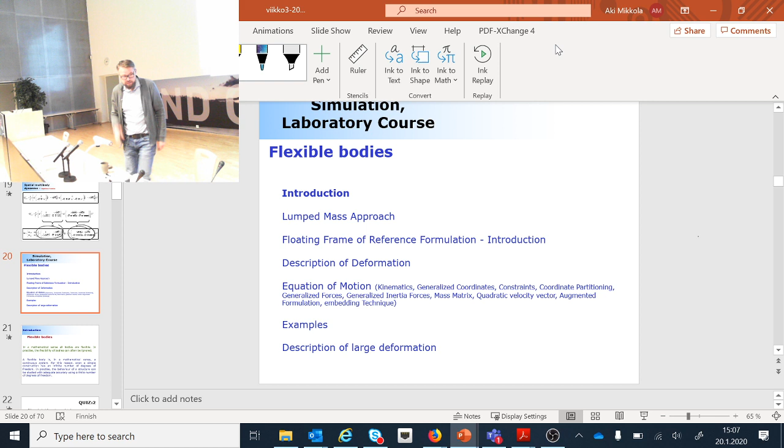First I will have a short introduction about what flexible bodies are and why you should model flexible bodies. Then we're going to look at two methods. We'll explain the lumped mass approach, and then I'll explain a problem with the lumped mass approach, which is called numerical stiffness. Numerical stiffness is something I will ask as an in-class quiz, so keep this in mind. As soon as I start the discussion about numerical stiffness, put your full attention on me. Once we're done with that, we'll move on to the floating frame of reference formulation, where I'll explain the short background of the finite element method, where it originated from, and what the idea is. Shortly speaking, it's all about how to predict how particles between the nodal locations behave, based on certain assumptions. This behavior is typically predicted using polynomials, and how that creates something important called shape functions, which I hope you'll understand based on my discussion. But let's get started with the lumped mass approach.

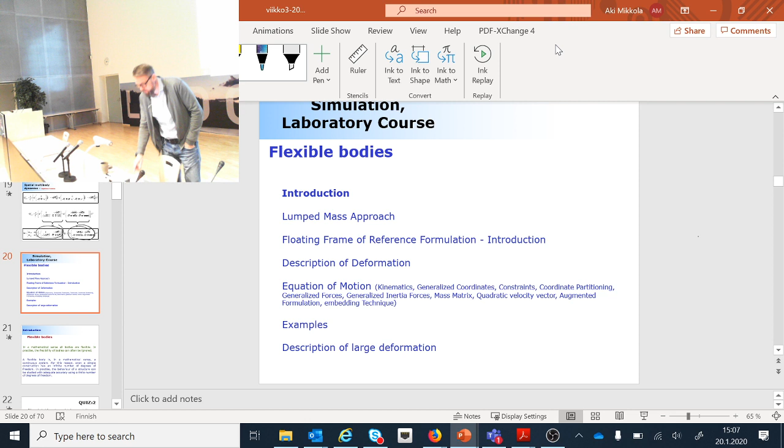All right, let's get started with the overall description of flexible bodies. You know there's no such thing as rigid bodies in real life. You cannot purchase a rigid body because every single body is a deformable body. Now comes a difficult question: if every body is flexible or deformable, should we model all bodies as flexible? This is a more complicated question than it may seem, because the reason to model deformable or flexible bodies is to increase the accuracy of the models. The history of multi-body dynamics started when the whole method was invented in the late 80s, beginning of the 90s, and all bodies were rigid. Soon people realized this assumption of rigid bodies is not very good, because it can lead to predictions very much against reality, so the accuracy of the models was low. To improve accuracy, they understood that deformation plays a significant role and must be accounted for. This tells you the reason why you should model bodies as flexible bodies: to increase accuracy.

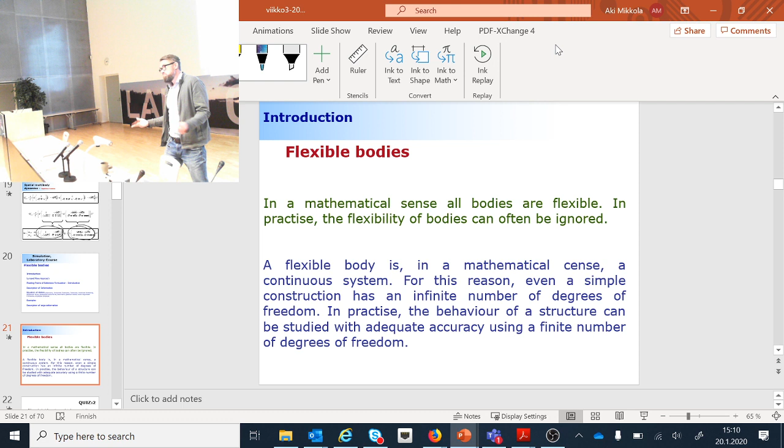Alright, so let's move on to how the methods work. But prior to that, when body deformation needs to be accounted for in a multi-body application, the considerations are: when large forces are applied to the system, when the natural frequency of the body is low, or when a slender structure is considered. There's no general rule to make this decision. Okay, so let me move on to this next.

Oh, now we have 27 students. Good number of participants. Okay.

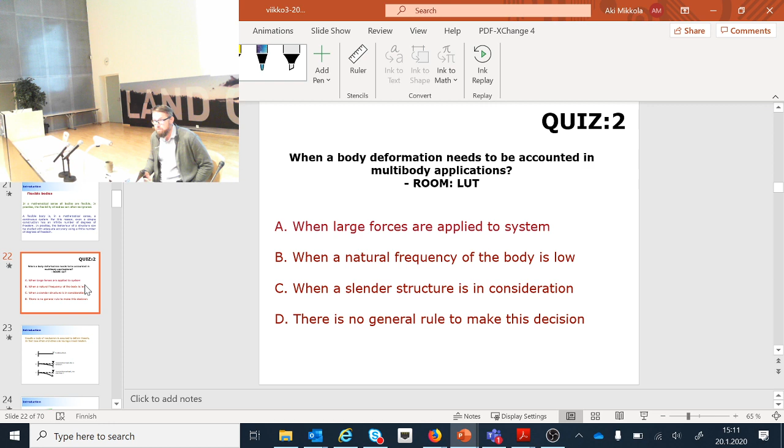Okay, let me explain something, and then we'll move back to the in-class quizzes in a minute. This is what I shortly explained to you in the course on simulation of mechatronic machines. Flexible multi-body dynamics can be considered its own discipline, and this discipline can be divided into two categories based on the amount of deformation: small deformation problems and large deformation problems. It's very hard to say where small ends and large begins.

Here's the difference: if your strain-displacement relationship is nonlinear, then you can describe large deformation. On the other hand, if you're using a linear strain-displacement relationship, then you're limited to small deformation. This is what I explained to you already, but it's important, so I need to make sure you understand this.

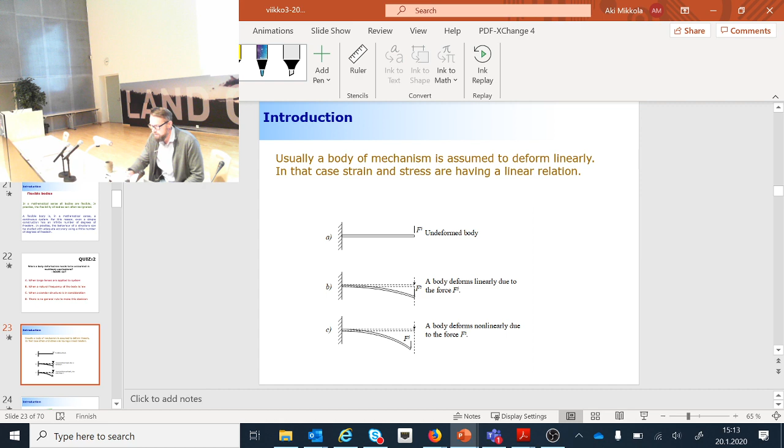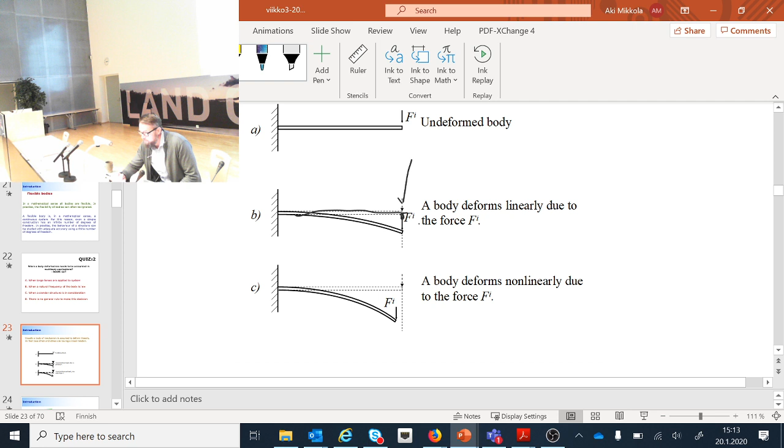First of all, what is a displacement? Displacement is the relation between my original configuration, which in the case of a cantilever beam is a straight configuration like this, and the deformed configuration. The displacement tells you how this particular point moves because of the loading force applied at the free end. This is going to be hard to draw clearly, but let me try.

Here, this is the displacement, called the U displacement, the deformation due to this force. Deformation, of course, depends on where you look along the structure; it's going to be different here versus there. So that's what deformation is: the difference between the original configuration and the deformed configuration. You can express the deformation with respect to the length of the body, so it's a function of x.

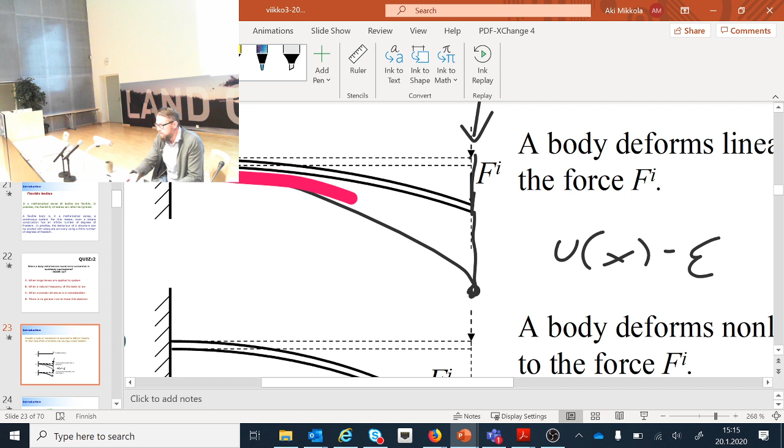There's a relation, a possibility to derive strain from the displacement, denoted as epsilon. If this relation is linear, that's when you can capture small deformation only. What does that mean? If you have this structure, as shown here, and you load this free end, the free end will stay in the loading line, which is fine if the deformation is small. But if the deformation is large, say it moves to this point, the deformation looks like this—and you can see that's not what happens in reality. In reality, the deformation is something like this, and the difference is that there is an axial movement. This axial movement requires that the strain-displacement relationship be nonlinear.

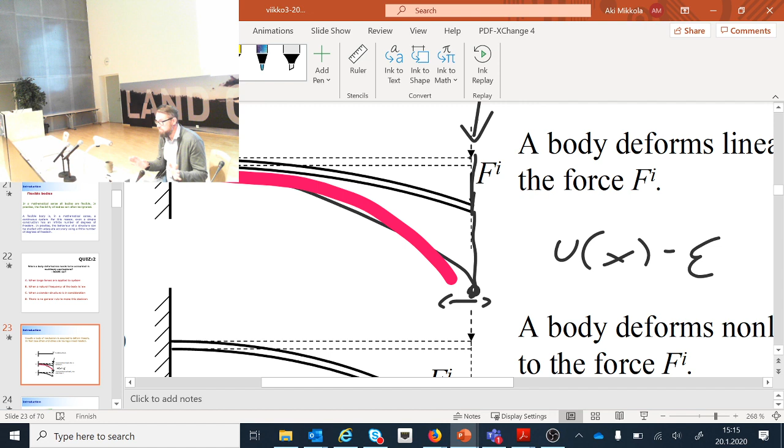There are methods to account for that nonlinearity. We will shortly touch on those methods, but the main emphasis will be on small deformation problems only. Okay? So that's how it goes.

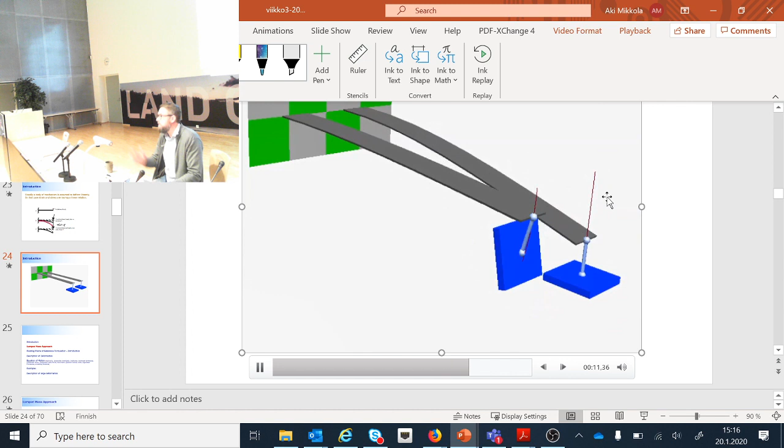Now here's an animation. When you look at it, it's clear that this one accounts for the nonlinear deformation, while this one assumes the deformation to be linear—the strain-displacement relationship is linear. This is sometimes referred to as geometrical nonlinearity, because it introduces significant geometrical changes to your structure, that's why.

Then there is another type of nonlinearity that can take place, material nonlinearity. The relation between strain and stress could be linear if we're speaking about small strains, but it becomes nonlinear if you have plastic deformation. That's what you already know. In multibody dynamics, we typically never discuss material nonlinearity. Only in certain biomechanics applications is it accounted for, but usually it's not. Why? Because often, if speaking about steel material, if you have permanent plastic deformation, then you have a really, really lousy design.

Why is it a lousy design? Because if you have any structure, it should not experience plastic deformation, except very locally—globally it should not take place, because otherwise it ends up as a bent structure, whatever the loading direction is.

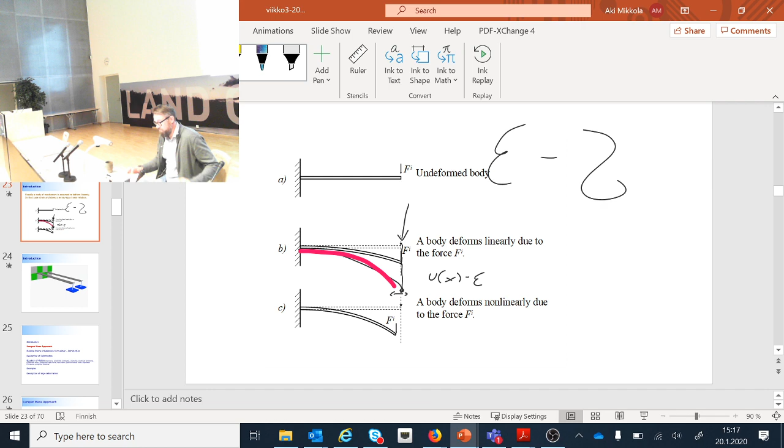Okay, now we're going to look at this first method that you're already familiar with. We're going to look at why this is something that we cannot use in practical cases, and it's related to computational efficiency. Computational efficiency of this method is low because of something called numerical stiffness. This is not yet the time that I will explain it. We'll explain it in a second.

Okay, let's first look at this.

Do we have a problem in streaming? We should not, but it looked like the online participants are now coming into play. That's how it seems. Okay, let's leave this for a little while.

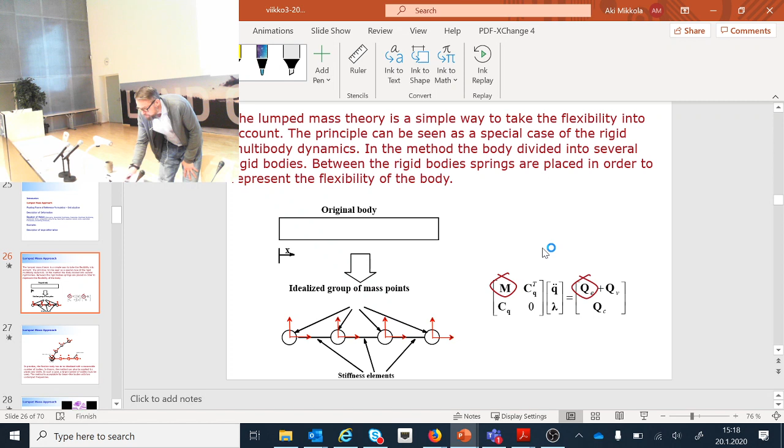Let's look at this first method. Now this first method is something that you already know. It's lumped mass theory or lumped mass method, which is very, very simple. It's not in the family of flexible bodies, because these do not need any changes in the kinematics. You just take the original body, which usually has to be a beam-like body, and you divide your beam-like body into a number of rigid bodies. And then what you're going to introduce between these rigid bodies is stiffness elements that introduce stiffness to all 6 degrees of freedom. That's the method in short.

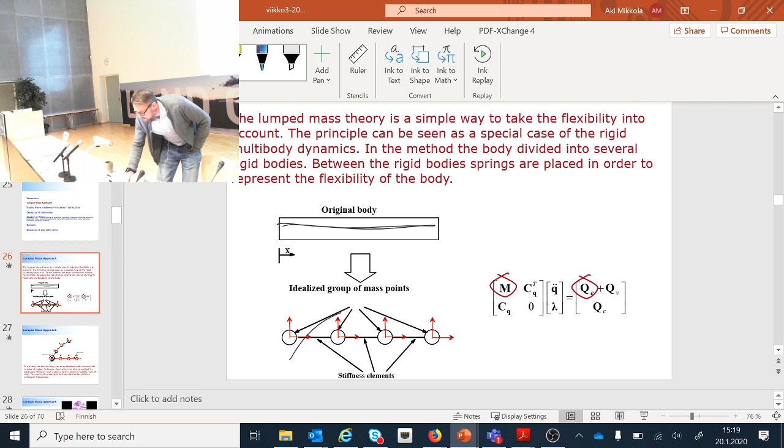Now, what is this numerical stiffness that this method is introducing? Well, if you look at the frequency content of this structure, there are low frequencies, which are typically associated to bending description or bending deformation. If this beam-like structure is bending like this, the frequency is fairly low.

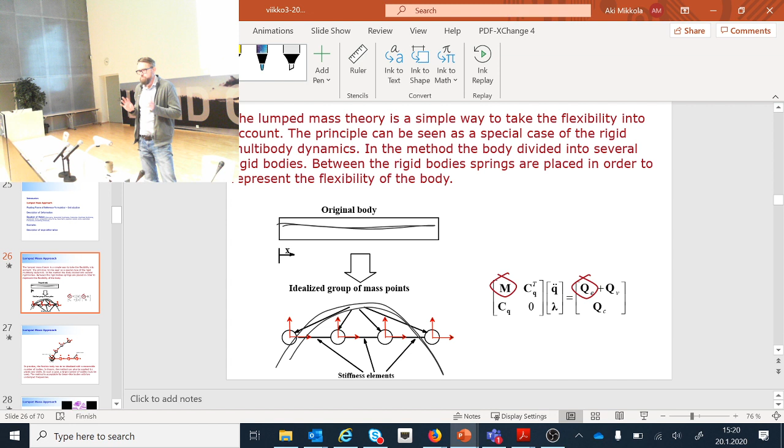If speaking about the numbers, it could be, say, 50 hertz or less than that. But it also includes very high frequencies. Where are these high frequencies coming from? Each one of these bodies can move with respect to each other. So it's possible that the body in the middle is moving axially with respect to its neighboring bodies - axial deformation. And if you think about that frequency, that's much higher than the frequency associated with bending.

You got it? There's no stick here, so it's a little hard to make a demonstration. What kind of lecture room is without a stick? Okay, this is another good example. I'm not going to break my pen, but you know, the bending deformation here, I can easily do it. But stretching this, only I can do it because of big muscles - big muscles make it happen. But you cannot do it for sure, for the same reason. Now you need a lot of force to make this stretch axially, so it's associated with a very high frequency.

Now comes the problem. So we have small and high frequencies in the same model. So how does that make your life difficult? Let me explain why.

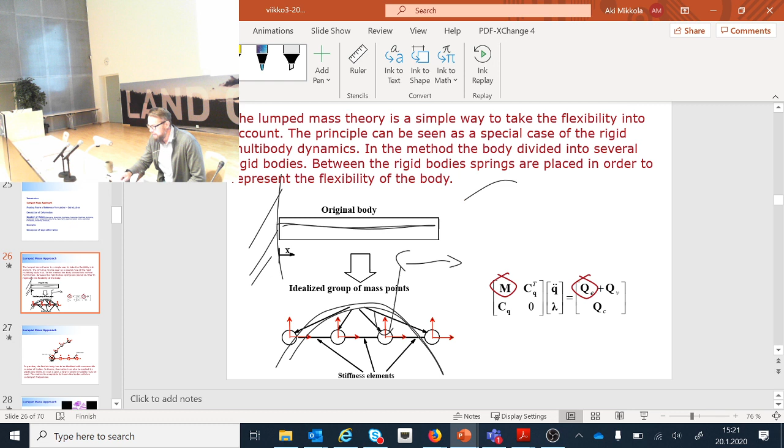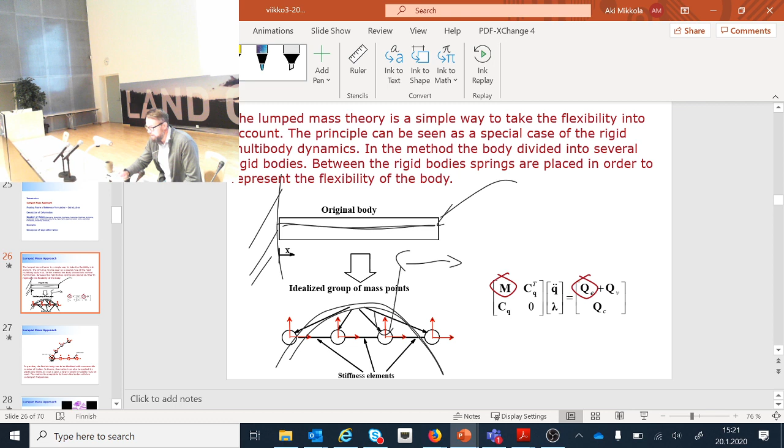Now, if we look at the response of this structure, such that we can attach this to ground here, and we load it in, say, a random direction, it's going to cause bending deformation, but axial deformation too. So now, if you look at the response with respect to time - here's your response, let's say x this direction, and time - the response looks like this. But now, if we take a close look at the response, let's say we take this particular spot here and make it much bigger, you will realize that there is a very high frequency here, which may not take place in reality. This may be very artificial because of the modeling technique we have.

But numerical integrators are able to identify this. They recognize that, wait a minute, something happens here. So let me tune my time step to figure out what this thing is that happens. So it actually tunes the time step such that this frequency is captured. Why? No reason, because we don't care about that - we only care about the big picture. But it's not allowing you to do so because it is looking at the details and is not willing to give up the details. So that's numerical stiffness.

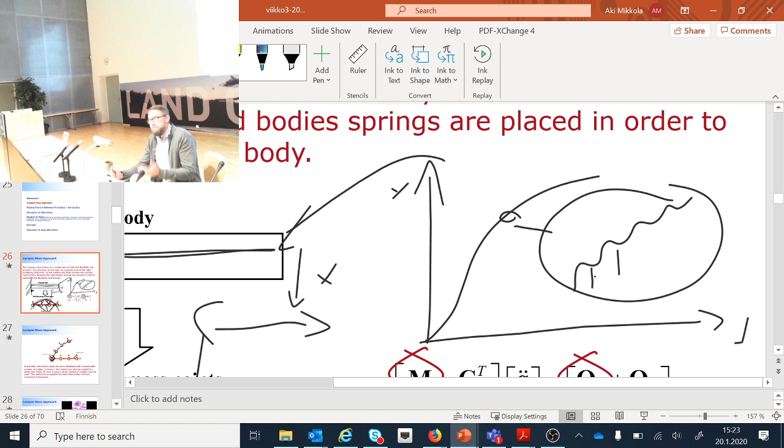So shortly, if you have a structure - let's make another drawing - if this is the frequency content...

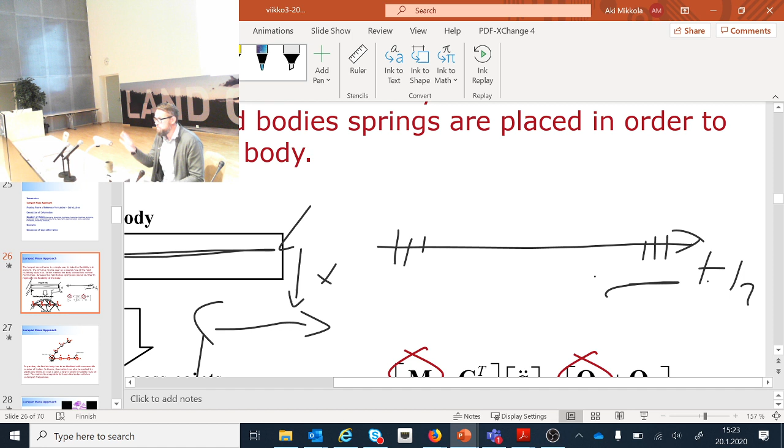So you have here low frequencies and then very high frequencies. This is where the numerical integration procedures suffer, because they get stuck due to these high frequencies, and they're tuning the time step to capture that. And we usually don't care about that, so we'd rather focus on this, but integrators are not allowing us to do so.

There are some techniques that are tailor-made for this kind of numerically stiff problem, but still, this is always something good to try to avoid when making models.

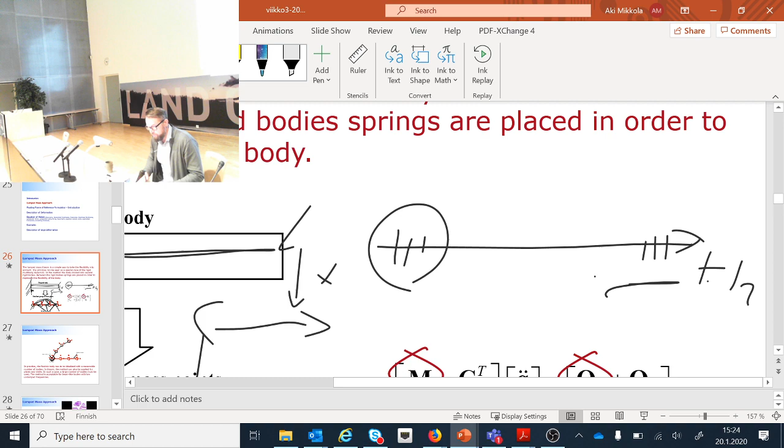So how is this method? Each one of the bodies is considered with respect to each other, so it's even able to describe this nonlinear behavior to a certain level.

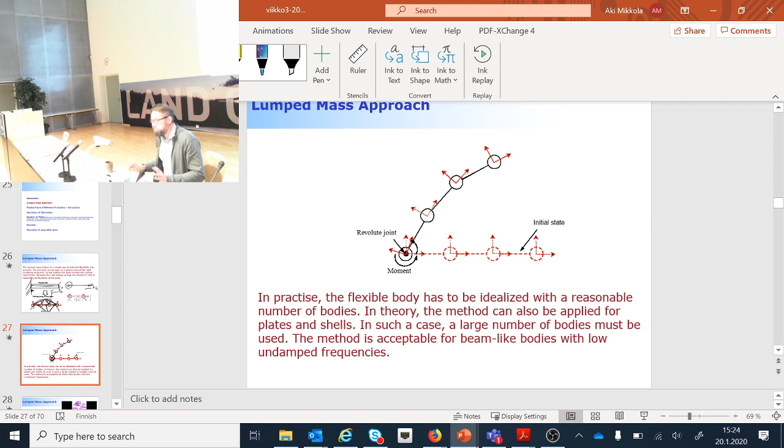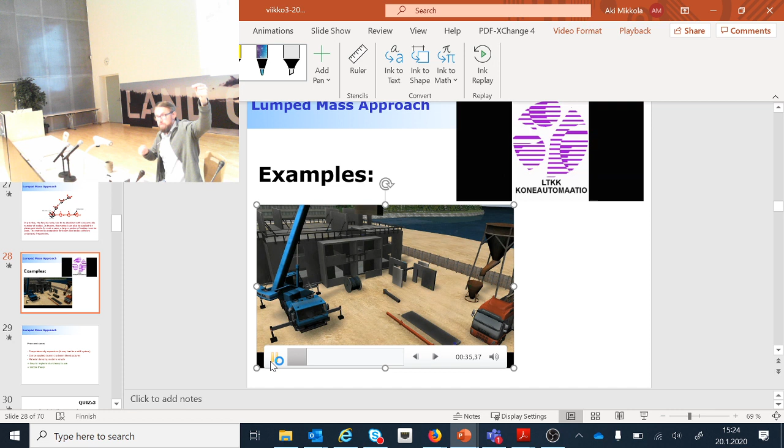Yeah, that's what you do. This is how you tune your guitar, because you make it tighter. What happens then? The frequency goes higher. Oh yeah, yes - I don't play guitar, so I don't know this. So if you screw it really a lot, then it goes really high. It's called tuning, isn't it? Yeah, okay, string effect.

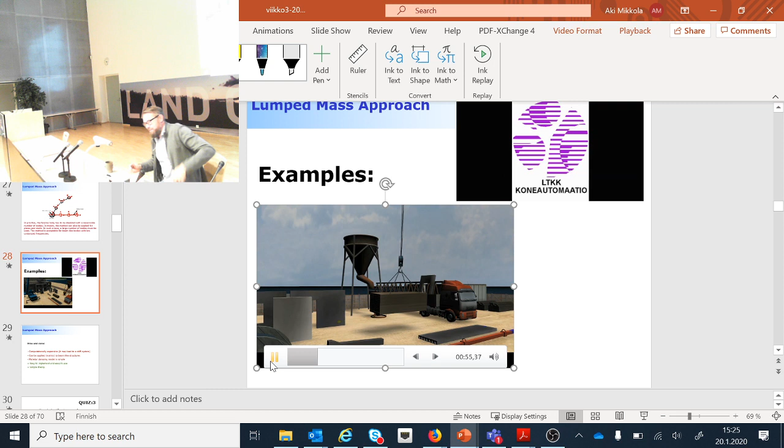Cable-like structures are still modeled like that. This is very old-fashioned, a very old simulation model. This is where beam-like structures are modeled using this approach as well.

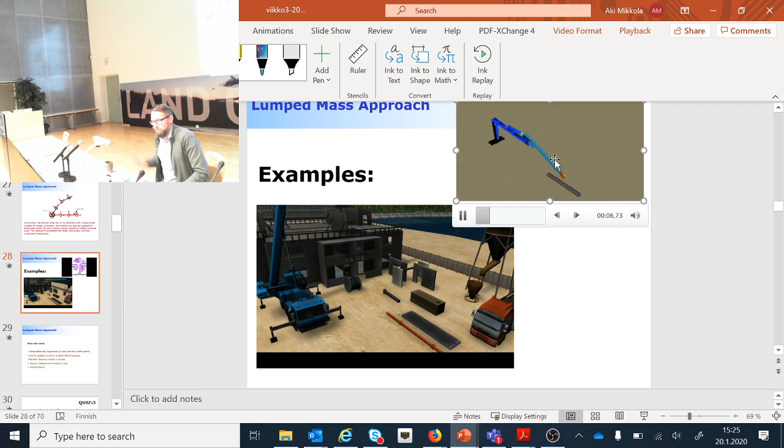Okay, but let's move on. Now, computationally, it's an expensive method because it may lead to a numerically stiff system. Next, I will ask, what's a numerically stiff system? Can you answer that?

Would you like me to repeat it, or do you know what it is?

This method can be applied mainly to beam-like structures. Material damping model is very simple - we'll get back to damping a little later in this course. It's easy to implement, easy to use, with a simple theory.

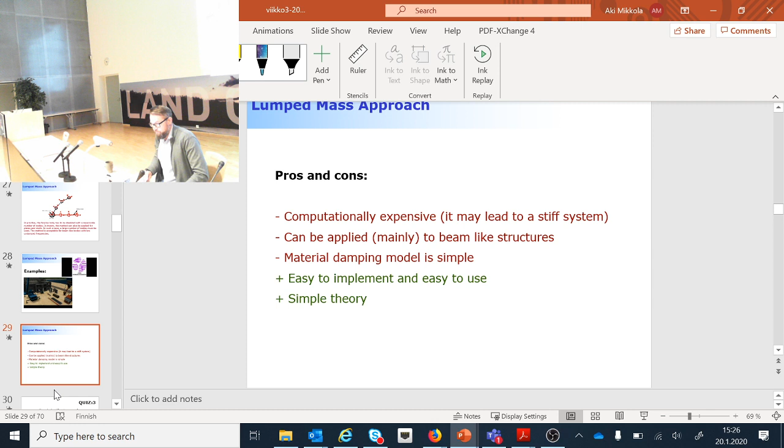Okay, and with that, let's move on. Now we're done with this in-class quiz. What is your prediction about the success rate?

80. Yeah, I think this 100% happens once in a lifetime. Once in a lifetime, once in your lifetime. So this was a really big deal for you too. It was for me too - you noticed I was crying a little bit. Okay. Very good, very good, very good, really good.

Maybe two students entered the answer incorrectly.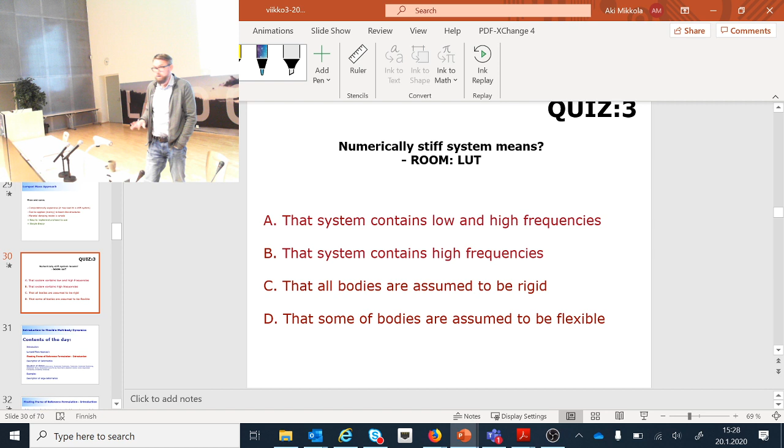You already entered your answer. Okay, so then let's look at the floating frame of reference formulation, and that brings us to the finite element modeling technique.

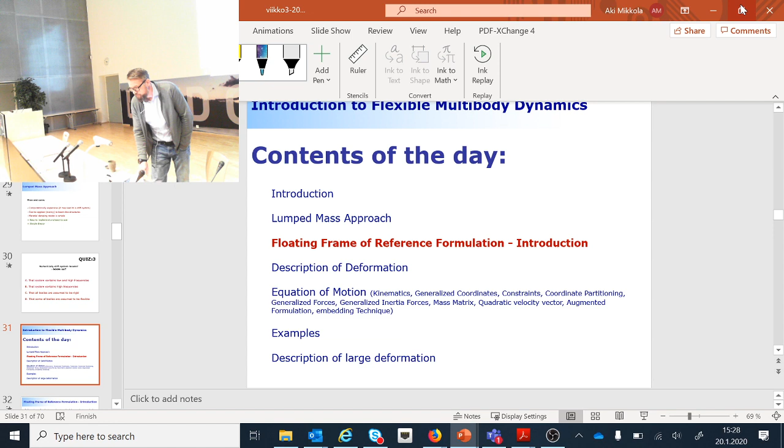You want to see the correct answer? Okay, let's take a look.

Seems that some of you are still thinking. Are you expecting me to first say the correct answer and then you enter your answer?

Would you like to change your answer? You can't. Okay.

So maybe this is... oh, now it seems more of you. You guys are all done. I guess this comes with a sudden delay, I suppose, because I don't know. There's a temptation for me to say what the correct answer is, but then look at this - it's like 14 students on.

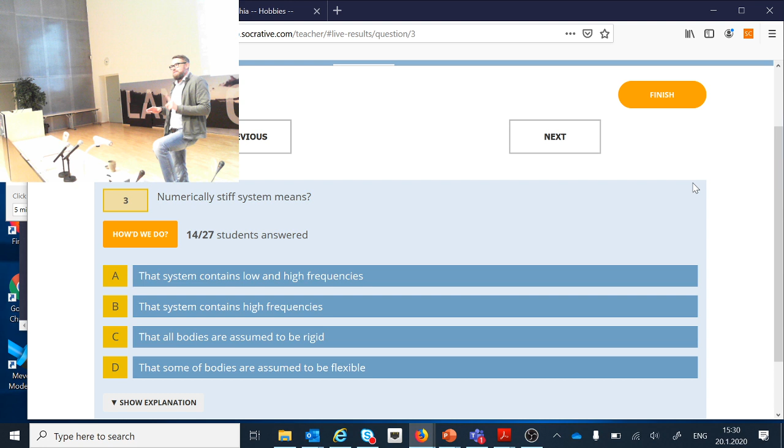Okay, so let me leave this for a little while and then we'll get back to that after, say, 5 minutes. All right? So we're here.

Okay, now floating frame of reference formulation. Now the most important observation is that, if we're using body reference coordinate system, and with help of body reference coordinate system we describe the deformation, then it is possible to combine finite element method, which is typically very strong to describe small deformation with respect to certain coordinate system, and multi-body dynamics, which is really strong to describe large translation and large rotations.

Now, this method, the floating frame reference method, is actually that. So it's actually doing this combination. And now, unfortunately, I don't have the list of questions, but I need to show those questions to you in the beginning of next lecture. But one of the questions that is often asked is like, why this method is called floating frame of reference formulation, where the name is actually coming from.

Shortly, it is coming from the fact that this reference coordinate system is used to describe the deformation. In case of rigid bodies, reference coordinate system is attached to body and it stays where it is originally located with no exception. In case of flexible bodies, it can actually move a little bit with respect to your body. And this is where the floating is coming from.

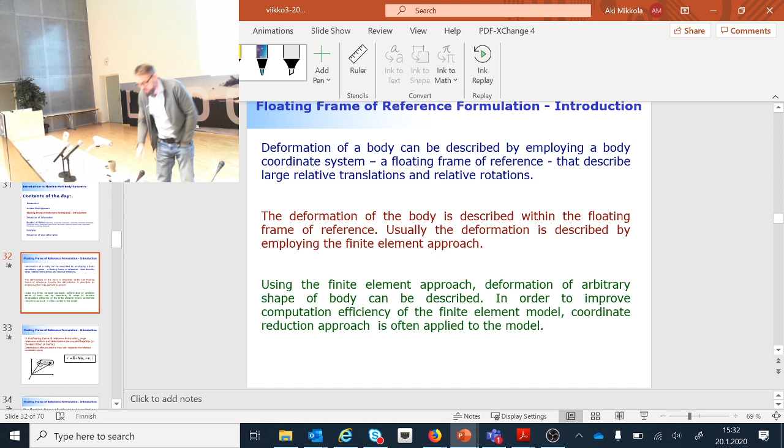Now, here's how it looks mathematically. So we have description of kinematics in this equation. In this equation, I have, first of all, translation of body reference coordinate system with respect to global coordinate system. No difference. And then I have here rotation of body reference coordinate system with respect to global coordinate system. No difference. And then I have here vector u bar 0 that tells me where the particle is originally located at. And then I have here displacement.

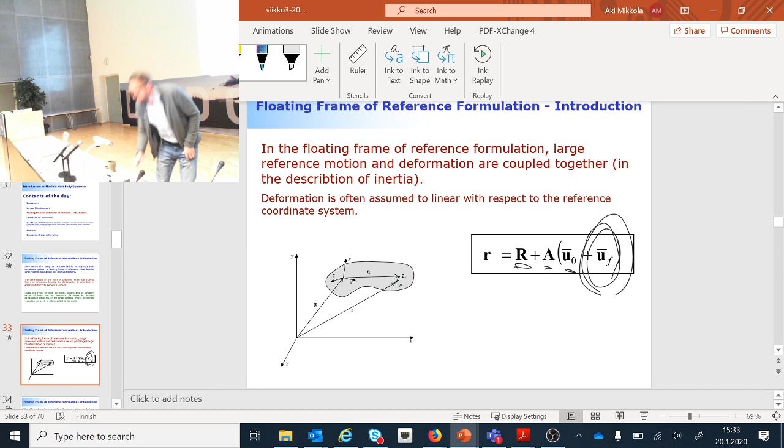This displacement I will solve by using finite element method, because otherwise it may be hard to do so. So here is in a nutshell: kinematics, we add one more component, and that one more component is a vector u bar f. And this vector u bar f, I will solve from finite element method.

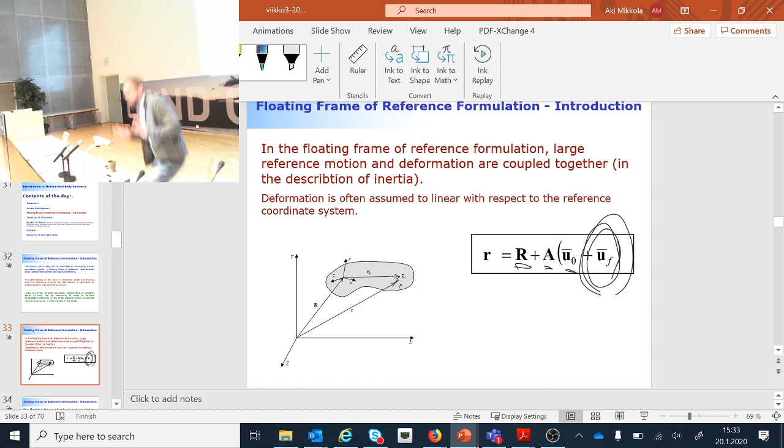Because in a finite element method, you know that it's very strong to solve the small deformation with respect to certain coordinate system. This time, it will be that body reference coordinate system. You don't know the finite element method yet, but shortly speaking, it is describing the stiffness properties of the structure with help of stiffness matrix K.

And then, when you multiply the stiffness matrix, this is equal to the external applied forces. That's what we do in a finite element method. So we're taking this stiffness matrix, we invert it, and we substitute that to the right-hand side of the equation to be able to solve displacements, which are called nodal displacements.

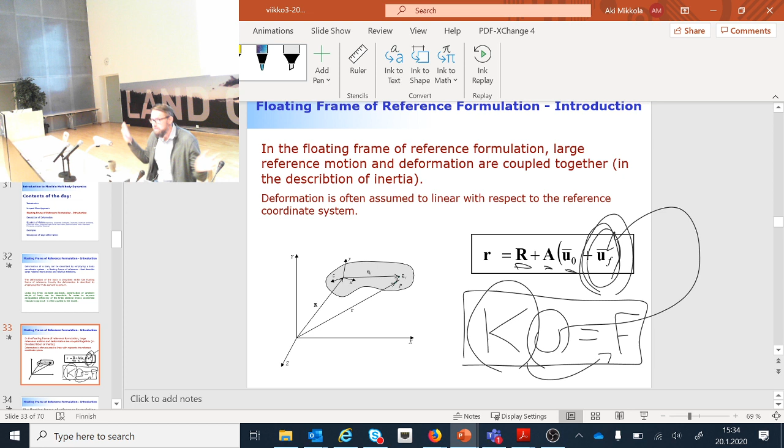This is an information that, with modification, goes here. I'm cutting the corners a little bit because actually the component that is missing here is inertia of the flexible body. So I should also have that there too, but shortly speaking, this is how it goes.

Okay, this is where the inertia is included. So I have here inertia, stiffness, and external applied forces, all with respect to body reference coordinate system. And then I have here multi-body system dynamics that is describing the large translation and large rotations. That's how it goes. These two components have to be coupled together.

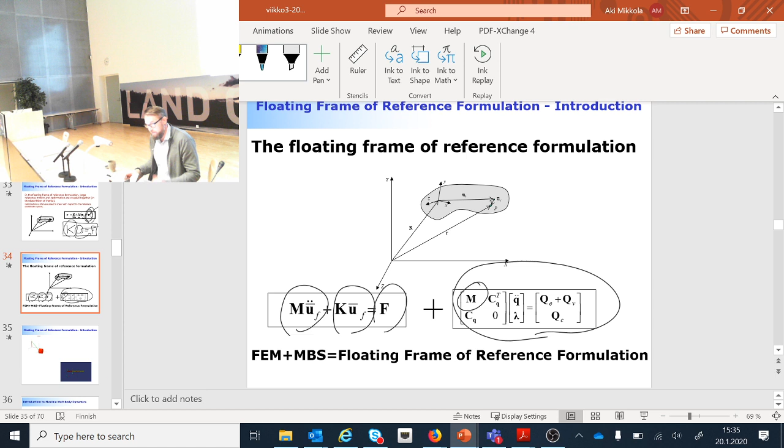And they will be coupled together here in inertia description. How it goes, that I will explain you a little later, maybe next Monday, with a few examples. So these animations are not here right now, so I need to show them a bit later to you. But this is a typically used method to describe flexibility, very often used, not limited to beam-like structures. And why is that? Because I can model any kind of structure with my finite element method.

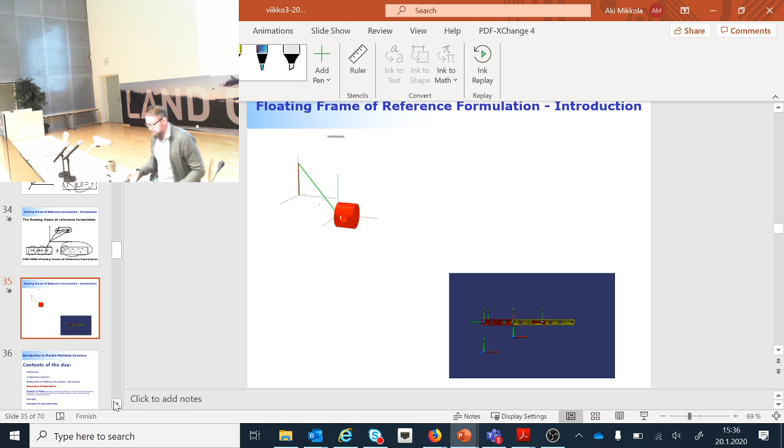I can use solid elements, I can use beam elements, I can use shells and plates, I can use whatever I want—well, not whatever I want, but the structural elements and solid elements I can use. And this is information that tells me how the displacement is. That's exactly what I'm after here.

Now, description of deformation—I'm going to use the next 10-15 minutes for that. So it's the finite element method. Do you know why the finite element method is needed? To describe the displacement. Next we're going to look at how the finite element method can predict the displacement for you.

Often the finite element method is explained through nodal locations. There is a net, and the net consists of these nodal locations. If this is a beam-like structure, I have one node here, then another node here, and what is between is unknown. It's a big black box. You have no idea what happens between these nodal locations.

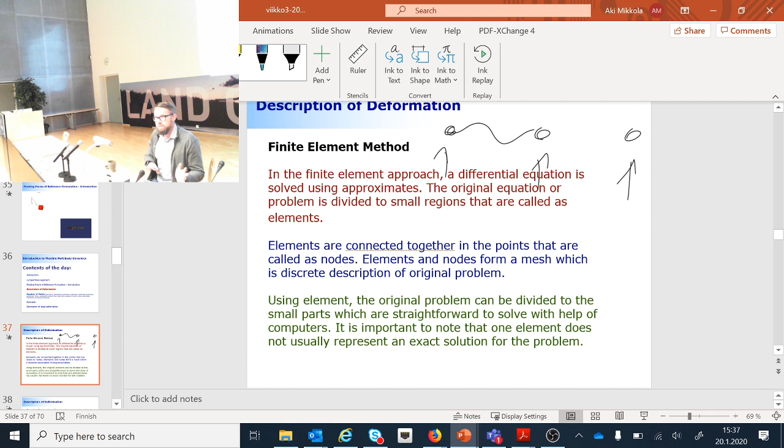Sometimes they are explained as springs that are there. The finite element method is all about how to predict particles to behave between these nodal locations. It's a very, very essential component of the finite element method, and that's how I'm going to explain it to you next.

But the big picture of the finite element method is this: it is a method to give an approximate solution. This is, by the way, very important to understand. So it can be correct, but is not necessarily correct. It's an approximate method, and its solution gets better and better as you increase the number of elements.

Typically, how fast you get an acceptable solution is called the convergence rate—how fast it converges to the correct solution. It depends on the case and on many different things. But it's important to understand that a finite element solution may be correct, may not be. There are ways to estimate its accuracy, but you need to be careful what you do.

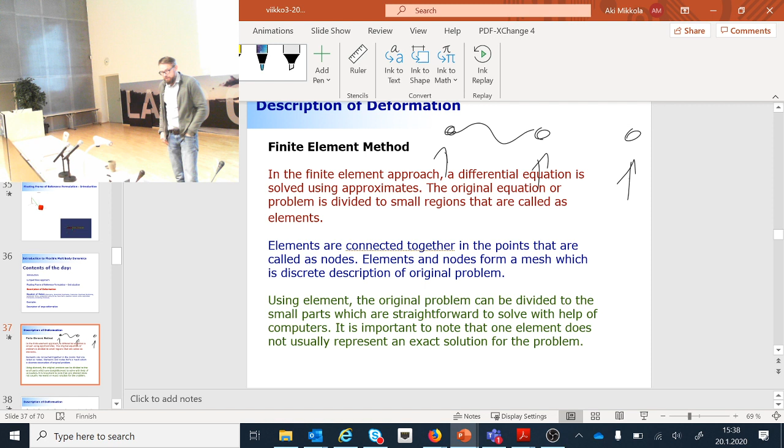Now, the method, as the title implies, consists of elements. You have elements that are ingredients of the structure, and you can connect these elements together at nodal locations, making structures that look like a fishnet. A plate-like structure is actually very close to a fishnet—that's how it looks.

Now you solve for the displacement at the nodal locations, but you still have full understanding about each one of the particles, even those not located at the nodal locations. That's how it goes—a fairly straightforward method, since you can divide it into smaller structures. It's easy to do the complete computer implementation of the finite element method.

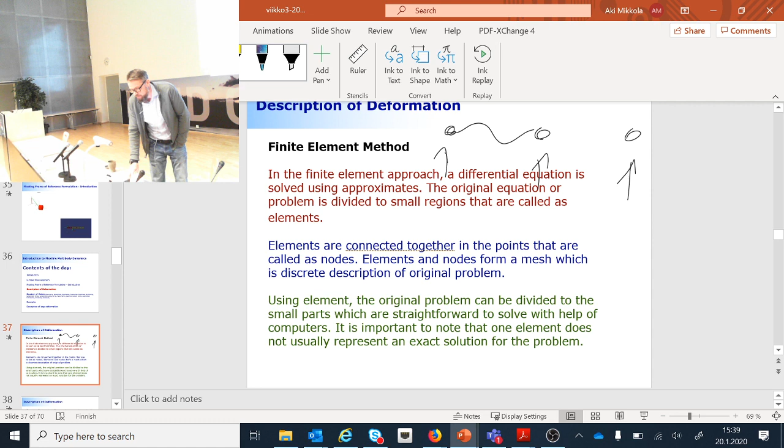Here's what I would like to explain: how the finite element method works. So I have here a very simple element—the simplest possible element. You may be confused because it's so simple, but let me explain what it is. It's an element that consists of two nodes, node number 1 and node number 2.

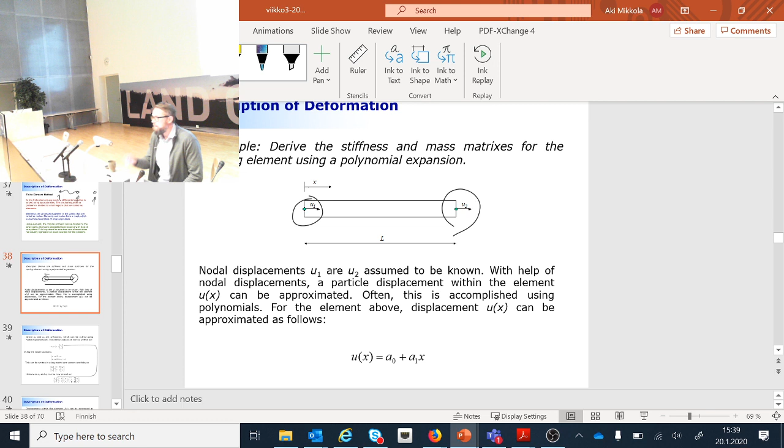Each one of the nodal locations, the node, can only have a displacement along the x direction. So this node here can only move back and forth like this, and this one here can only move back and forth like this. So it's like a spring—a spring element. You're still with me?

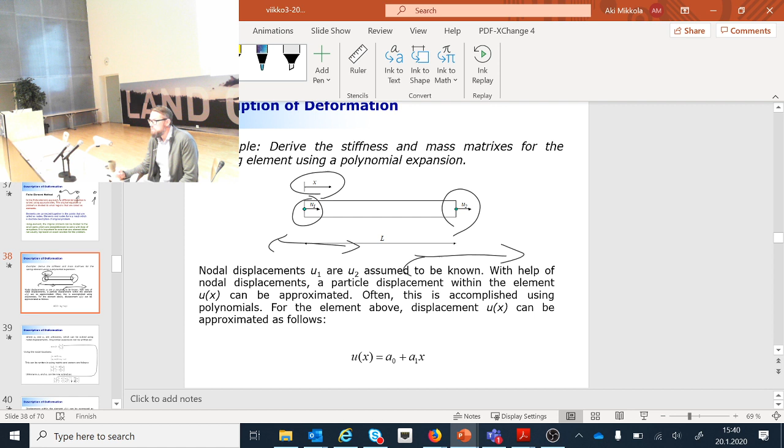Now, what I would like to do is get a prediction about how the particles are moving between these nodal locations. Let me erase this—how is each one of the particles moving. If I take hold of this end and move it here, how do the particles between node number 1 and node number 2 behave? That's the question where the finite element method gets started.

This prediction can be carried out using polynomials. So now I have a total of 2 degrees of freedom in my system, because there are 2 nodes, each with 1 degree of freedom, so that's a total of 2. Now I can make a prediction about how the particles within this element behave using a polynomial. I can write it as shown here: a constant polynomial value, and then another polynomial that is x. That's it—that's the finite element method.

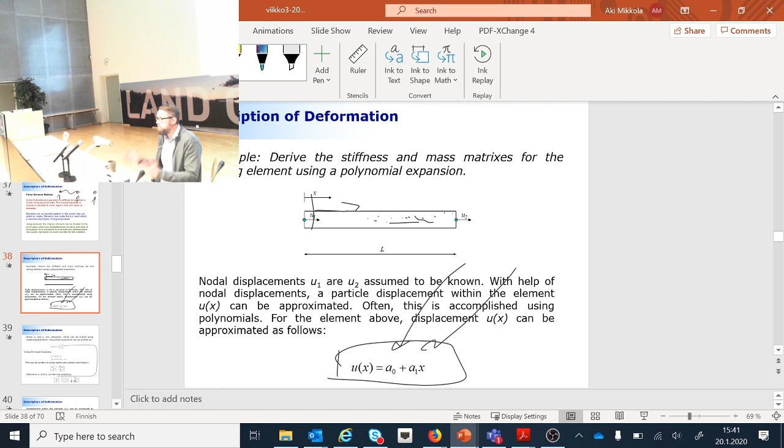Now what I'm doing here is using this polynomial expansion to solve for my unknowns. The unknowns would be—hold on, so what is this doing?

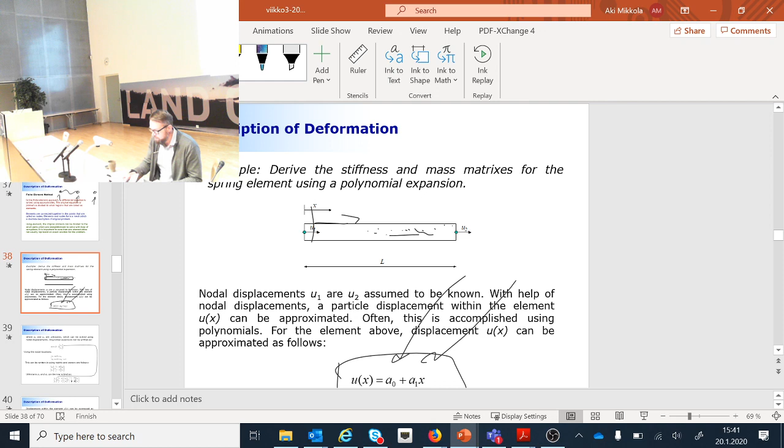No. Okay, let's change the color then.

So the unknowns are A0 and A1. That's it. I could solve that, and that gives me displacement. That's all that I need.

Now there is a bit of a problem. What is a physical interpretation of these A1 and A0? Not very clear, so it's not easy to say what they stand for. What should I interpret if I get the numerical values for A1 and A0? That's a little difficult. So what I should do then is actually convert this polynomial expansion to

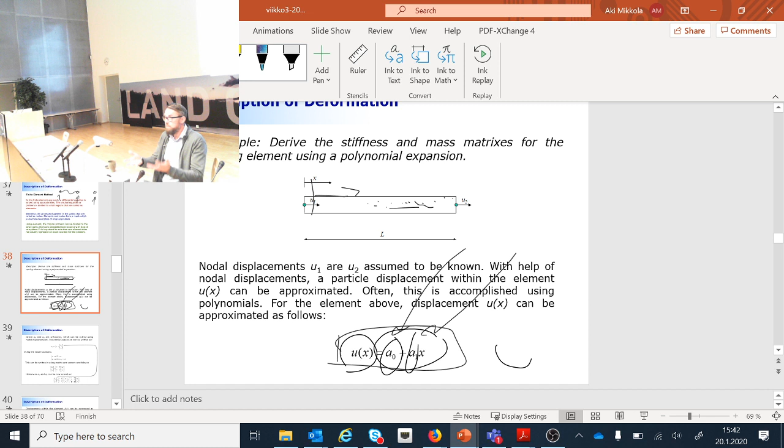be expressed by using nodal displacement, because nodal displacement makes an awful lot of sense. They are something that we can all understand. Because if this node here moves 1 meter in this direction, we all know what that means. It means 1 meter that direction. So it's clear, all right?

So we need to make a trick here. We are not able to deal with the polynomial expansion directly, but let's modify them a bit. Now let's express this polynomial by using nodal degrees of freedom. That will give me a shape function that tells me how this element is planning to behave.

This, by the way, is a decision that somebody has made in advance, but it tells you quite a bit about the performance of your element. All right, you got the idea? Seriously? Because I'm not sure myself, but maybe this becomes clear soon.

Okay, so now here's my polynomial expansion. This is how it is originally. I'm just expressing that using my unknown polynomial coefficients as a separate vector. But if you do this operation, you will see that it's just a little bit of manipulation, nothing else. Clear.

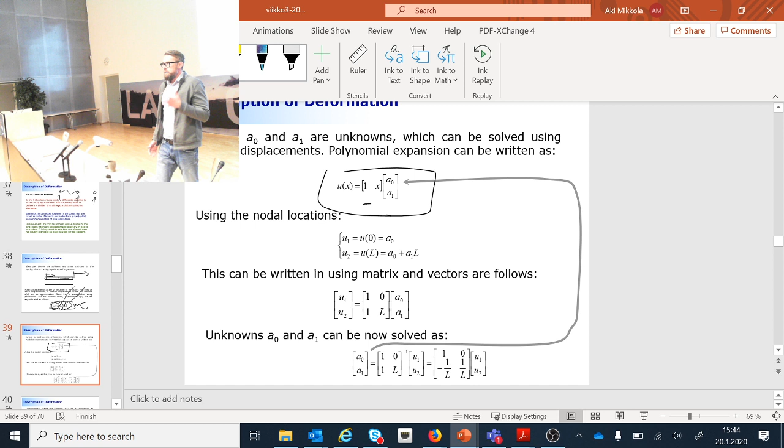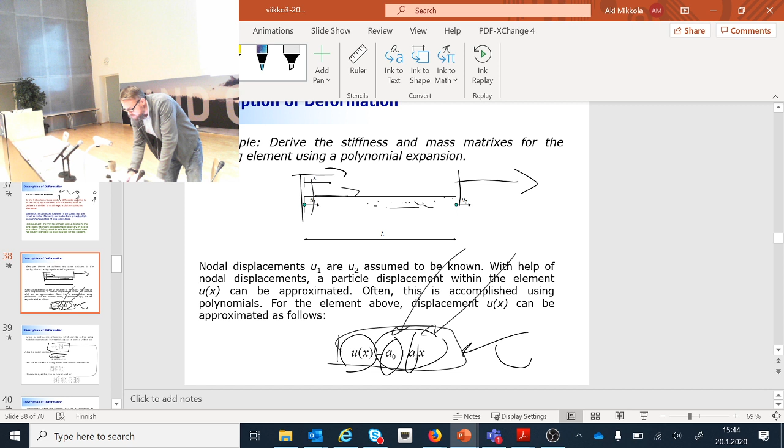Then I will use the information that I have. The only information that I have is that I know where these nodal locations are in my undeformed configuration: my x is equal to 0. If we go back to this slide here, you will see that when x is equal to 0, then you are in this nodal location. And when x is equal to L, then you're in that nodal location.

That's it. So this is when I'm substituting the information regarding the location of the first node, and when I'm substituting the information about the location of my second node, now the x here is L. So I'm doing my substitution. Now this is something that I can use to create a relation between nodal displacement and unknown polynomials. You see that that's my relation.

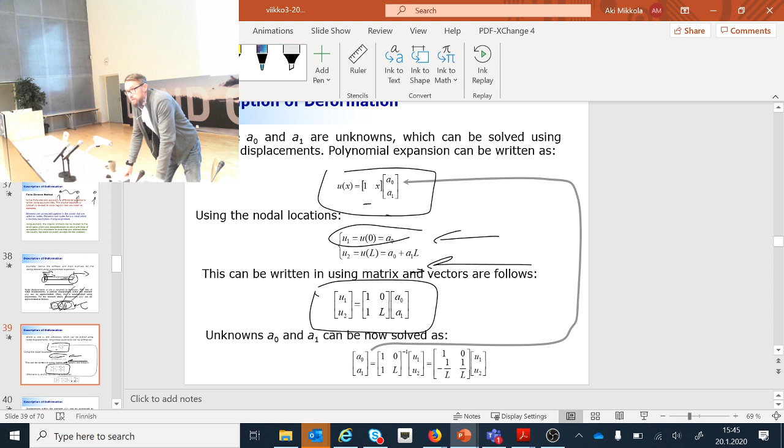This is where I can take these unknown polynomial components and solve them, such that I will take this matrix, put it on the other side of the equation, and invert it. Right, now here how it is.

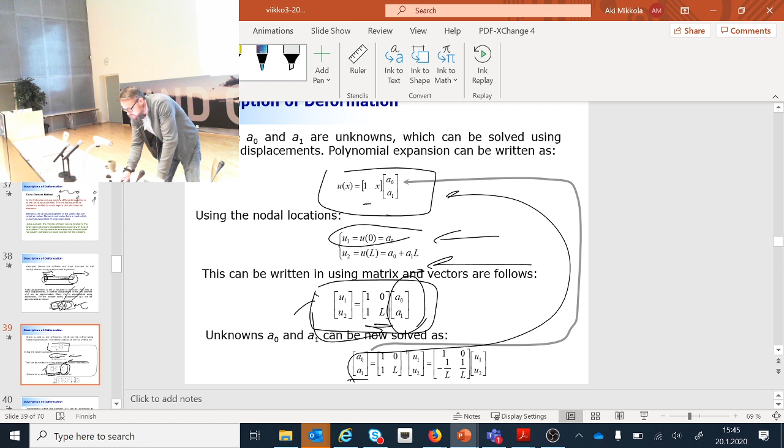I can substitute this information back to my original equation, and I can get something that is called shape functions. These shape functions tell me how particles are moving if I'm introducing displacement to one nodal location, one nodal degree of freedom.

Let me tell you a story. You know, this matrix that I'm inverting here is a 2 by 2 matrix. All right, clear.

I'm sorry that this is a story from history, but because of my age, these are the only stories that I'm able to tell you. When I was young, okay, and now it's started. So when I was a postdoc, I was a researcher at the University of Illinois at Chicago, UIC, where Dr. Shabana is working. He is the most well-known character in this field. So I was working with him, under his supervision as a postdoc.

And I got an assignment, and the assignment was to create the shape functions for the plate element that consists of 48 degrees of freedom. I still remember this like yesterday, absolutely no difference. So 48 degrees of freedom, meaning that in order to create the shape functions, this matrix that you're inverting has a size of 48 times 48.

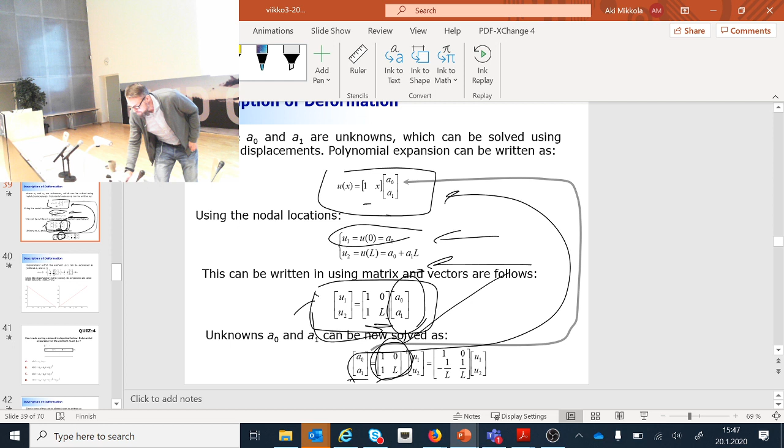Okay, so this was a very special plate element, and I started to work with that, and I made my first polynomial expansion. Everything looked good. I entered all the components to this matrix manually. A lot of work. And then I inverted that using symbolic mathematical software. I invert it, and it says singular.

So then I realized, okay, maybe there is a typing mistake. I checked everything, no typing mistake, so its polynomial selection was not the proper one. So I select another set of polynomials and make that 48 times 48 matrix, and then invert it, singular. And I spent 2 months in my life doing this, day in, day out, getting to office, typing the matrix, singular, and then over and over again until I developed some kind of automatic way to try different polynomials. And singular, singular, singular, singular.

I saw that sign so many times on my screen that I thought I'm going to lose my mental health. And then one day, not singular. How'd that happen? By luck.

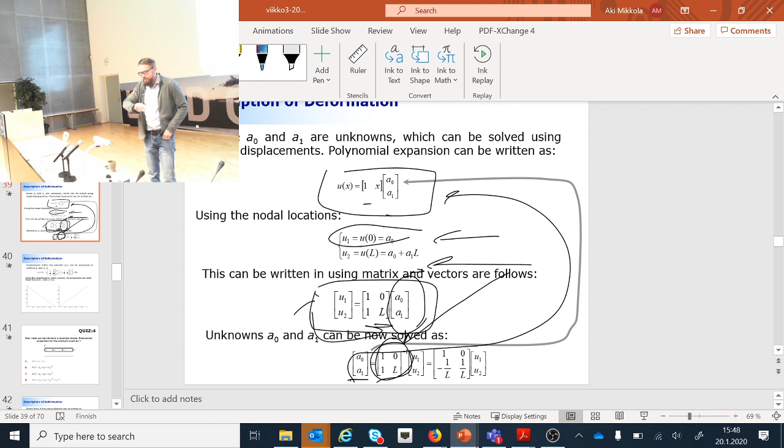Okay, so that's the horror story about these shape functions. All right, but now I promised, so what is it? We have 2 minutes. Okay, let me wrap this up.

So my shape functions here are this: 1 minus x divided by L. This tells you how the particles are moving if you're introducing displacement to your first node. This is a bit confusing, but you can see it's a linear distribution like this, so they are linearly distributed. They may not necessarily be linearly distributed, but in this case they happen to be.

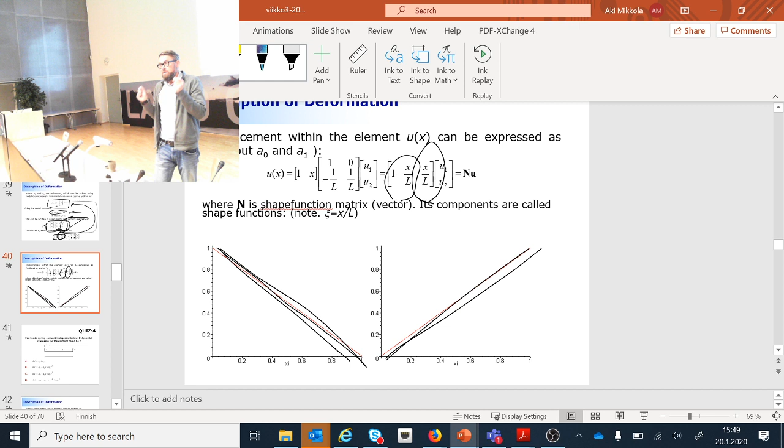If I'm introducing the displacement to the second node, they are again linearly distributed like this. So the displacement, it's a bit confusing figure, and it all becomes clear when you look at the beam-like structure when the deformation is in the transverse direction. But here's the important message: each one of the particles are still predicted. So I'm not looking at the element as a black box, quite the opposite, I'm predicting how they are behaving.

And now in this element, they can behave in 2 different ways, not more than that. But if I keep on adding elements, the number of ways the system can deform increases. Okay, so with that, let me get back to this next week.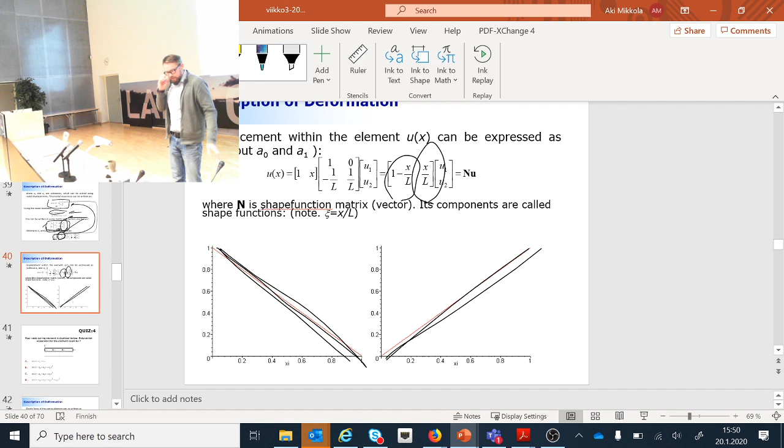And now comes moment of truth. Still okay, now it is. So we're done.

Okay, I guess you say you were confused about the string effect. Oh yeah, I know that. Of course, but you said it was a bit confusing explanation because of the string effect. So I guess that's why many selected B.

C is actually not the solution because there are ways to avoid the stiffness in case of rigid bodies, ways to make it happen. And because the body cannot deform, there is no frequency associated to that, so it's not infinite. And it's all right if you have high frequencies, if all the frequencies are close to each other, because then you can use something called scaling to solve them efficiently. But if you have one set here, another set there, this difference is what makes them stiff. So if they are heavily separated, high and low frequency, far from each other, that's what is hard to deal with, and that's what is called numerically stiff.

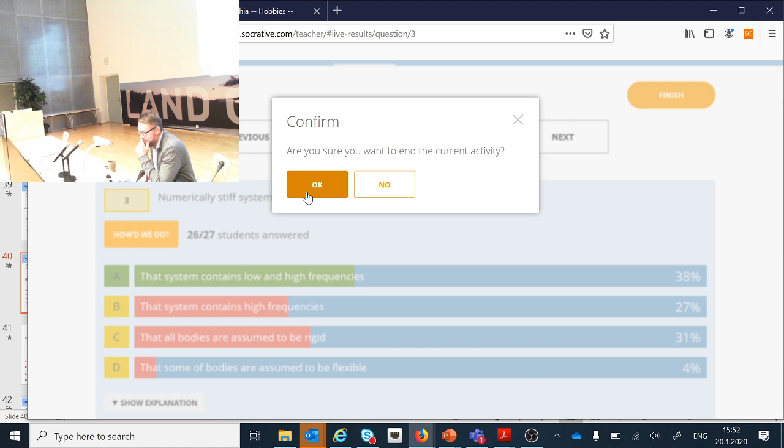So next Monday, I will show you the questions that are associated to flexible bodies. And then let's do a couple slides about the finite element method, not much. And then we're looking at the eigenvalue analysis, something that is very interesting, how that is associated to modal reduction. But shortly, the finite element method as it is, we really cannot use it that well in a floating frame reference formulation because it includes too many degrees of freedom. So we need to reduce it, and the way we can reduce it is called modal reduction.